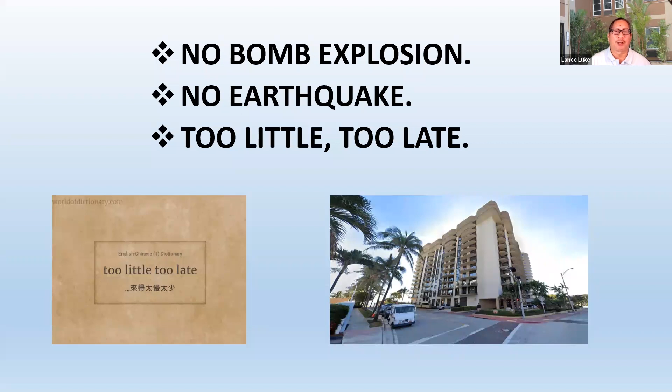If you see the photo of the building, that's actually the Champlain, Florida building before the collapse. And that's one angle taken. Right now, the property, as you know, is only land, because part of the building collapsed, and the rest of the building got taken down because it was unsafe.

Now let's talk about the city building inspection program flaws. Now this is a city in Florida, but the tower was not in that specific city, and other cities in Florida adopted the same building inspection program. And when I say flaws, there's not a flaw basically in the inspection program per se. The flaw that I'm talking about is the time period or the duration of having a building inspected.

Now in Florida, there's what's called a 40-year building safety inspection program. And the reason it's called 40 years is because when the building is first built, every year after that, there's no inspection until 40 years later. So the building has to be 40 years old before the first inspection is completed. And this is called a recertification program.

And the inherent flaw, in my opinion, in the program is, why do you wait 40 years? You should have the inspection done of these buildings after 10 years or 20 years even. That's my opinion. So the program is a good program, but they're taking too long to inspect buildings, and that's part of the problem.

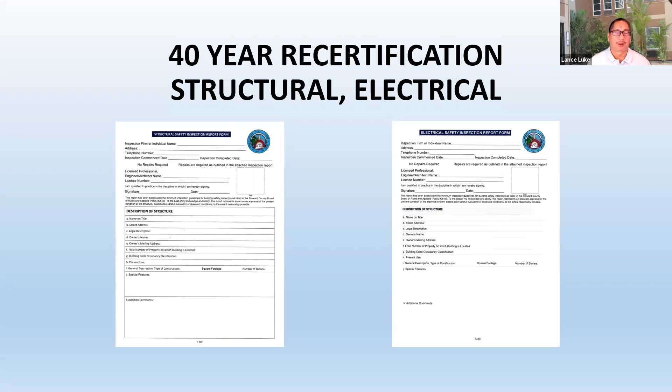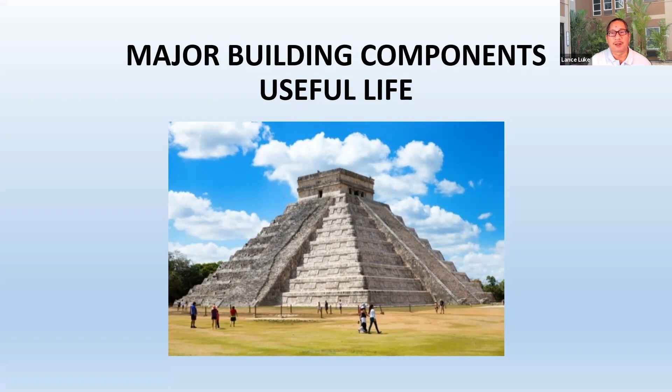But the reason there's no major spalling is that these components are basically large pieces of stone that were cut. There's no rebar that could get rusted or anything like that. That's the reason why these buildings are standing so long. And of course, there's no maintenance. It gets weathered, but that's the situation. Now, let's talk about a high-rise building, a high-rise condo building or apartment building.

The useful life, less than 40 years. Well, what are we talking about here? It could be a concrete wall. It could be a ceiling of a parking deck or the top of a parking deck. If the top of the parking deck is so worn, where the waterproofing is worn, guess what? Water is going to penetrate the concrete, hit the reinforcing steel, and now you got corrosion and water, and bad things happen to the concrete.

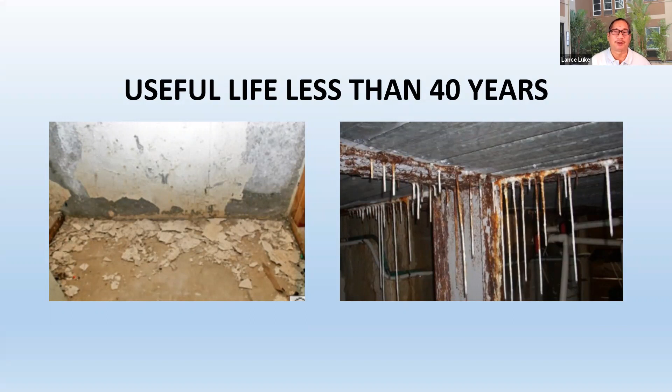The concrete by itself doesn't last forever. It doesn't. So it's a porous material that's not waterproof. So that's the problem. The other problem is there's other components that are going to last less than 40 years. And let's go right into that now. What kind of components have a useful life less than 40 years?

And when I say useful life, I'm talking about a useful service life, and the component doesn't function as intended, or it doesn't function as when it was brand new. Because over time, there's wear and tear, there's maybe vandalism, there's weathering, there's exposure to the elements, and all these kind of good things. So going down the list, and these are not every single component in a building, but these are major components that are major cost, large ticket items.

We're talking about an elevator. The useful life is 35 to 40 years. Some last longer. Electrical system, 35 to 40 years. Roofing, 10 to 20 years. Painting, 10 to 15 years. Waterproofing, 5 to 10 years. Now, these are just rule of thumb useful life years. Let me talk about painting as an example.

If your building is located in an area where there's a lot of sun, or in a marine environment, let's say you're located on oceanfront property, okay, such as the building that collapsed, or if your building is in Waikiki or in Kona on the coast, the painting is not going to last 10 to 15 years. The painting is going to last probably 8 to 10 years. So the climate, environment, and all those things have an effect on painting. So the rule of thumb, 10 to 15 years, that's a best case scenario.

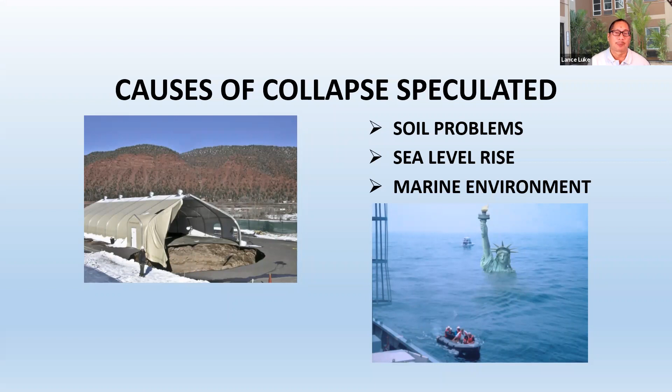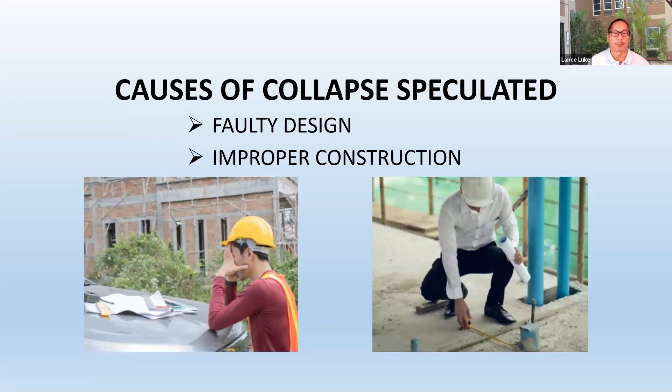Okay. Also, the concrete mix. If they put too much water in the concrete, then the mix was not to spec. Okay, so there's actually lawsuits now, and they're talking about suing the original architect and engineers and the contractor and developer and everybody down the line.

This is my opinion. The primary cause of the collapse of the Florida building was due to failure of structural components due to concrete spalling. And as I mentioned before, when the rebar gets moisture and salt, it starts corroding the rebar. What happens is the concrete surrounding the rebar cracks, and that's spalling.

And guess what? When the rebar is affected and corrodes, is it basically as intended when it was brand new? No. Now, when the concrete starts cracking off, is that a good situation? No, because the building, when it was first built, was not in that condition.

So if you're a property manager or a condo owner, even an apartment building or office building, this information applies to any kind of concrete structure or structural building, regardless of whether it's a shopping center, hospital, a school, apartment building, a hotel. It's all the same. You have reinforced concrete and you have concrete spalling conditions.

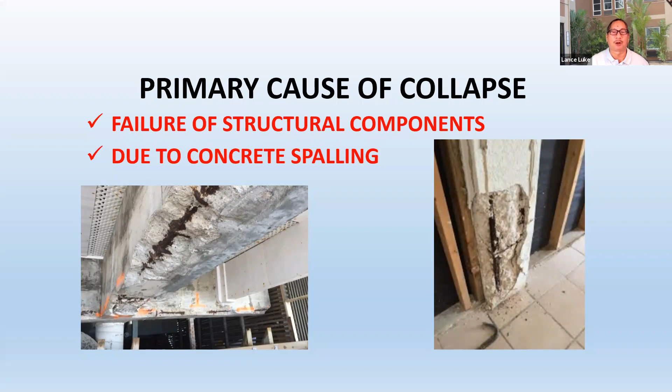Okay, so I just want to make that clear that it doesn't happen only on a condo building. Any kind of building made of reinforced concrete is exposed to this problem. Okay, so the primary cause of collapse is failure of structural components due to concrete spalling. Now, I'm going to show you

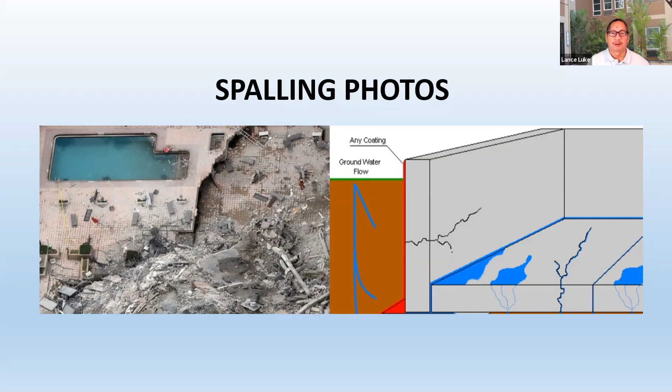So if this was a situation on your slab on grade in a parking deck, this is a condition that could cause failure. So there was a structural survey of the building in 2018, and the engineer found areas where there's cracks in the parking ramp of the parking deck, cracks in columns, beams, walls, water damage in the concrete slab above the parking level. There were some issues with the pool. So in 2018, it was already a bad situation.

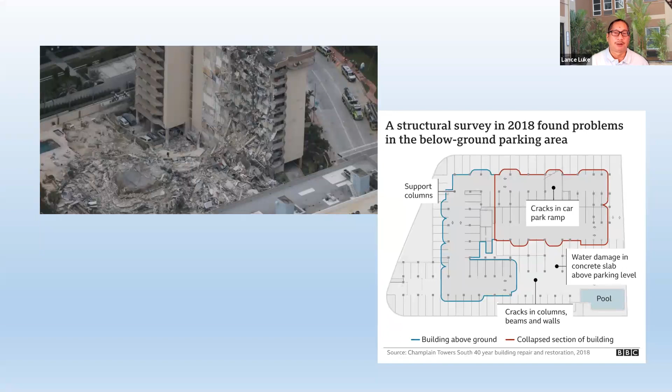And it was probably even before then, because in 2018, when the structural engineer did the survey and he noted these things, it didn't happen overnight. So these conditions have been going on for some time. Now, the survey that the engineer did was enough information, I think, to cause alarm. And in my opinion, the city of Surfside, Florida should have actually gone in and issued a violation notice and a notice to correct immediately.

I think they should have actually said, hey, wait a minute, we have a major problem here. We got to go to plan B. There's no time to be worrying about how much this is going to cost. This is a life safety matter. We need to get in there, get a contractor in there and start shoring the area and fixing things.

So over time, of course, new cracks, repairs. I think they inspected repairs and it wasn't so good. So there was major structural damage, failed waterproofing around the swimming pool. There was one report or maybe two that they were going to do the repair around the pool area, but then they said, oh, it's so bad, we can't even go in there. I mean, that's in itself a bad situation. Some more photos here.

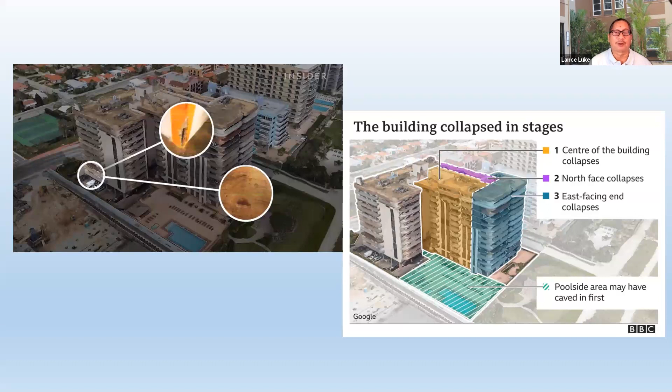Okay, the 40-year safety recertification, and I said I don't agree with the 40 years. I think it should be more like 10 years. So it's kind of a wake-up call for people in the industry, whether it's real estate developers or building inspectors, condo associations, apartment building associations. Everybody should be getting on the bandwagon saying, hey, we don't want this situation to happen anywhere else.

So why don't we go ahead, and it's going to become political, to change the 40-year to maybe a 20-year or 10-year recertification. And the recertification or this inspection, it's not all over the country. It's just in this area. For instance, in Hawaii, there's no 40-year recertification or 40-year inspection. There's no inspection. There's not even a 10-year or 5-year safety inspection. Once a building is built in Hawaii, there's no obligation, no requirement, no law that requires a building inspector from the local jurisdiction to go to the building and do the inspection.

So do you see the problem here? The problem here is that it's an honor system where the building department is saying, well, everybody's on their own and we expect them to look at their building, and if there's a problem, we expect them to fix it. It's kind of like self-monitoring. Well, as you can see, that doesn't work here, okay?

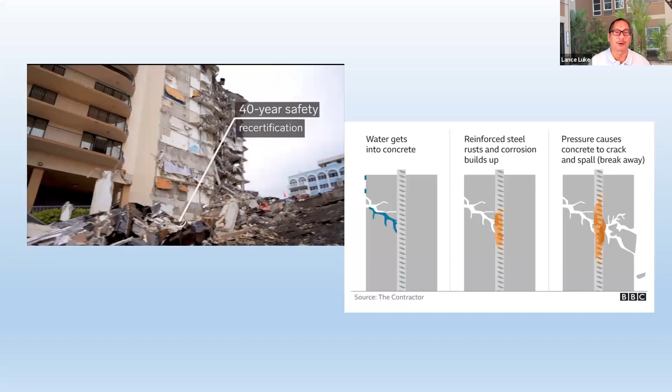Now, remember I told you about the parking deck where you're doing the fix, you jackhammer the top, and all of a sudden it goes right through. That's called a full depth repair, a full depth spalling repair. A partial depth is if it doesn't go all the way through.

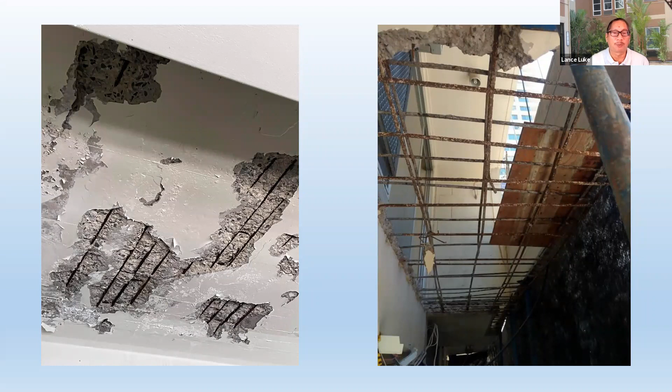Now, this photo here is of a building that I worked on in Waikiki. It's a hotel, and this was a walkway. So can you imagine how bad the spalling was in this walkway? Once they jackhammered, the whole walkway had to be taken out. Can you imagine if somebody was walking on the walkway and the thing collapsed and the person fell 2 or 3 stories? That's not a good situation. So spalling is a major problem. Don't let anybody tell you that it's not. If somebody does, have them call me and I'll talk story with them.

Now let's talk about some legal issues, and you may be concerned. Now, recently I found out in the Florida building that the insurance company tendered their maximum coverage. What was the maximum coverage? It was about 48 to 50 million dollars. And you might say, wow, that's a lot of money. Okay, but the problem is that the estimates from attorneys on settlement of the case are up to $1 billion. So the 50 million is not going to really solve the problem.

Okay, now in court recently, the judge took into consideration $50 million of insurance and added on 100 million for settlement. And where are you getting the 100 million? Well, he's saying that's the value of the land. So you take the value of the land, if it's sold, and you add it to the 50 million, now you have 150 million.

But 150 million is not enough to settle the case when the estimates to settle are $1 billion. So therein lies the problem. Okay, now, numerous lawsuits against multiple parties. What are the lawsuits? Well, not even within 24 hours, there was a first lawsuit.

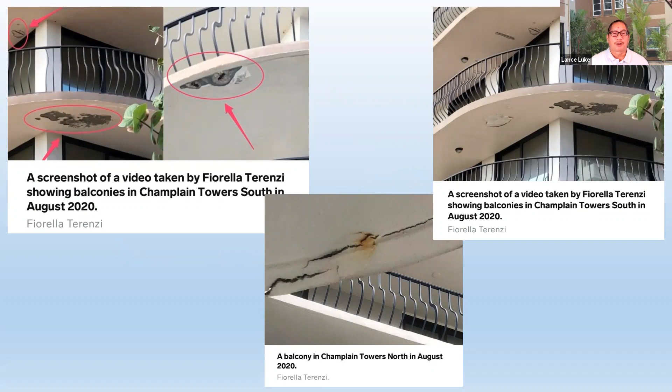Let me show you some other photos. Okay, these 3 photos were taken last year. And why were they taken? It was taken by somebody that was interested in buying a unit in the building. And some of these photos are actually screenshots of a video that was taken. So can you imagine a prospective condo buyer going to the condo building, interested in buying a unit, so I want to go and look at the building and look at the unit that's on the market.

So as a person is going through the building, they're taking a video, and the video screenshots are very disturbing. Why? Because if you look at the screenshot of the video, I can see paint peeling away. I can see corroded concrete at the walkways and balconies. And it's not a pleasant sight. So it's not like, oh, all of a sudden the building just collapsed. No, if I look at these, I'm going, no wonder the building collapsed. They got some major spalling issues here.

If you look at the photo on the bottom, you see cracks on the underside of the balcony, and the leading edge is actually the edge of the balcony where your railing is. If you see cracks on the underside, that's already a major spalling condition because water had penetrated probably through the railing or collected on the top of that edge and gone through.

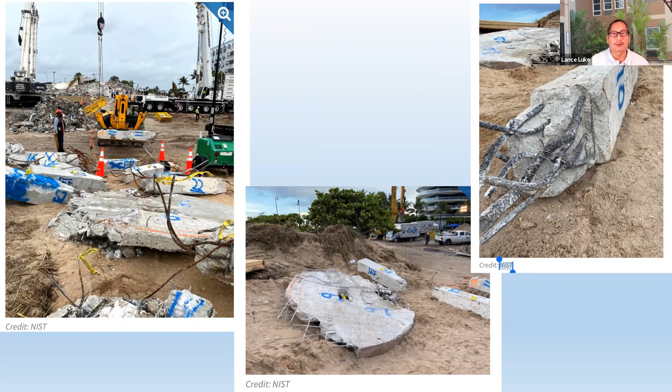So these are actual photos taken of the scene. As you can see, each piece of concrete is marked with a number, and they take it to another site and they lay it out, and they're taking pictures, doing an inventory, and they're going to attempt to put it together or construct it in some way using 3D modeling and things like that to come up with, well, where was the actual location of the failure? What happened here and all that.

So there's a whole bunch of engineers, specialists from all over the United States that are involved in this, and some even from around the world that specialize in building failures that are going to be involved. Now, here's another speculation. Was the original architect and engineer at fault?

So part of the evidence gathering is they're going to look at the original plans and specifications, and they're going to compare it to the actual building that was built to see if there were any errors or omissions in the plans or any kind of problem. And they're going to do that with the actual construction also by reviewing the components. So they're going to be doing all these studies and everything.